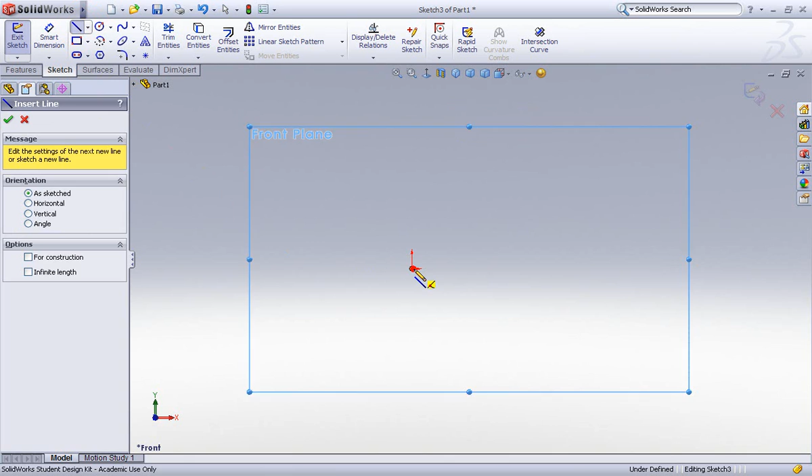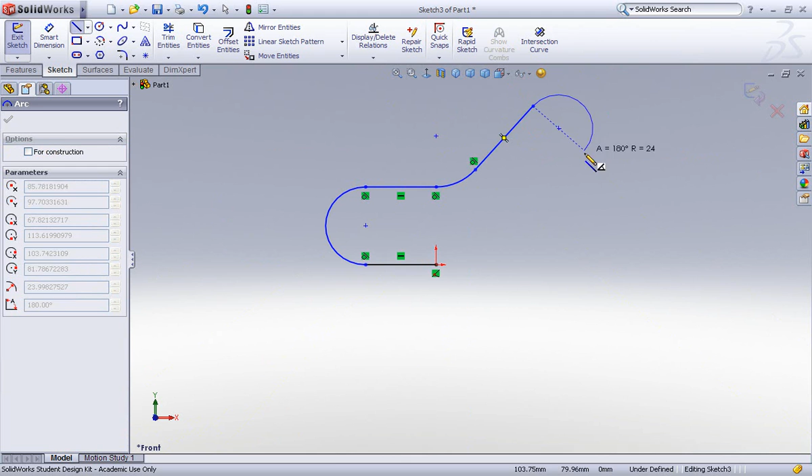Now we're just going to select line here, but we're not just going to do a simple straight line. We're going to put in a few curves and a line or two at angles, just to give you an idea of how flexible a Swept Boss/Base can be. Really, when you're marking out a path for your extrusion, the only thing that's limiting you is that if you make any curves that come back around in the same direction too narrow, SOLIDWORKS can't calculate the geometry properly.

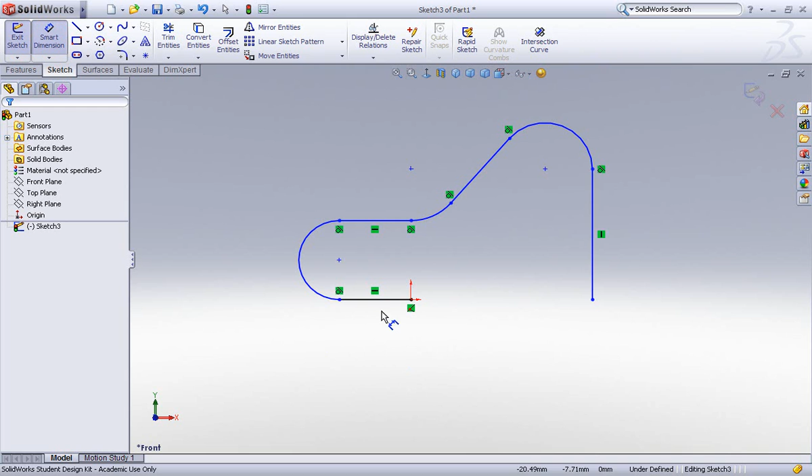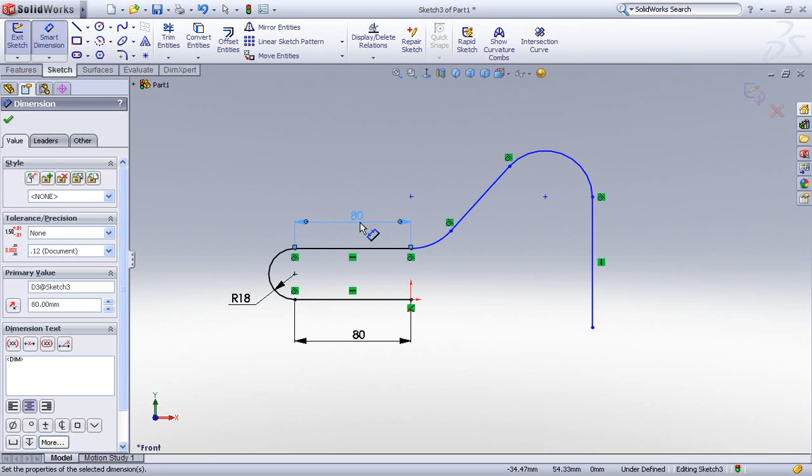So now that we have our sketch done out, next step is to smart dimension it. You can put down any dimension you like, but remember, try not to make it too narrow for the profile. Also, don't forget that when you're doing a sketch, it's always important to make sure that it's fully defined.

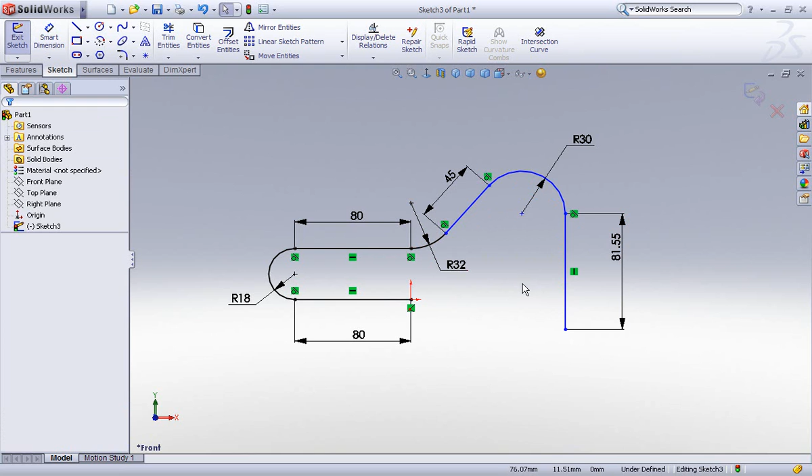So as you can see, there's still some parts of the sketch that aren't fully defined. You can tell by the blue line rather than the black. So I'm just going to exit out of smart dimension and try and move around the lines and see where that is coming from. So the center of the last curve isn't defined from the origin. To fix that, I'm just going to put in the dimension stating where that is from the origin.

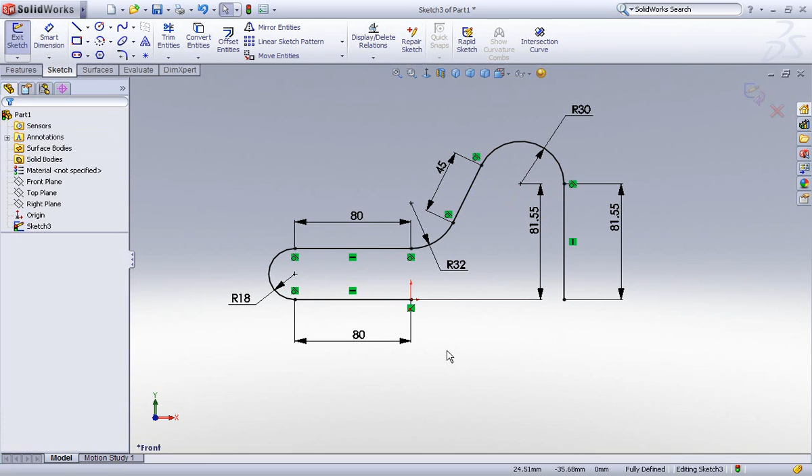And that's our path complete. The next step is to create the profile that's going to run along this path. So when we're looking to place our profile, the first thing to do is where are we going to locate it? The origin is probably the best place right now because it'll make defining it fully much easier. Plus, it happens to be on the end point of the line.

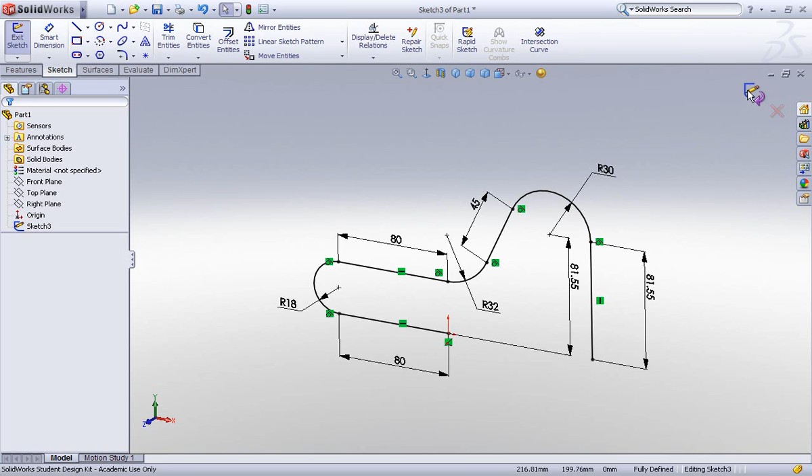Now, keep in mind that we're going to be doing this on the right plane, so it's actually not going to be on the same plane as the path that we've just drawn. So we'll actually have to exit the sketch so that we can do a sketch on another plane. So click right plane, sketch, and normal to. Now for the profile, we're going to try a polygon. In the polygon manager, you'll see we have quite a few options here. One of them in particular is for construction.

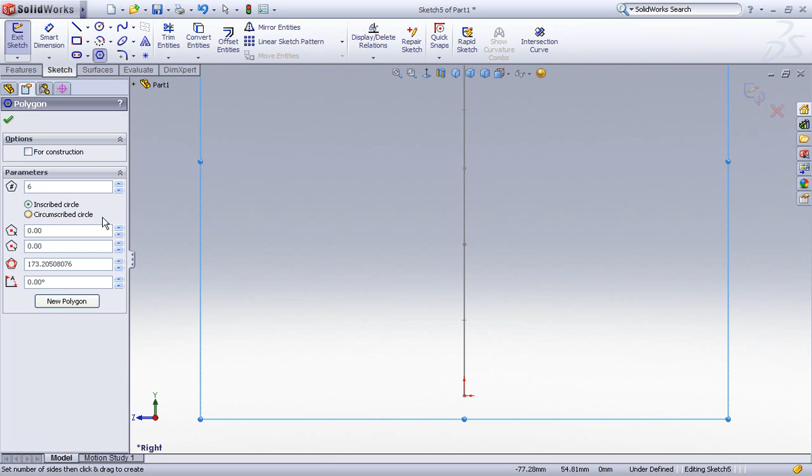This works on the same basis as the for construction option for the line, whereby if I was to click that, I'd have a polygon in construction and it wouldn't show up on the end part. But we're going to keep this unticked for now. This box here basically defines what type of polygon it is. Right now it's set to 6 sides, so it's basically going to be a hexagon we're going to be drawing out. And you can also decide whether it's going to be an inscribed circle or a circumscribed circle. So we're just going to keep these options as they are.

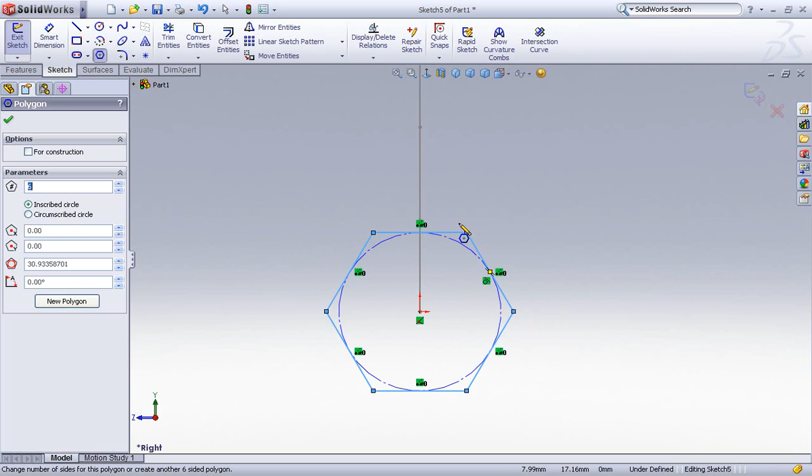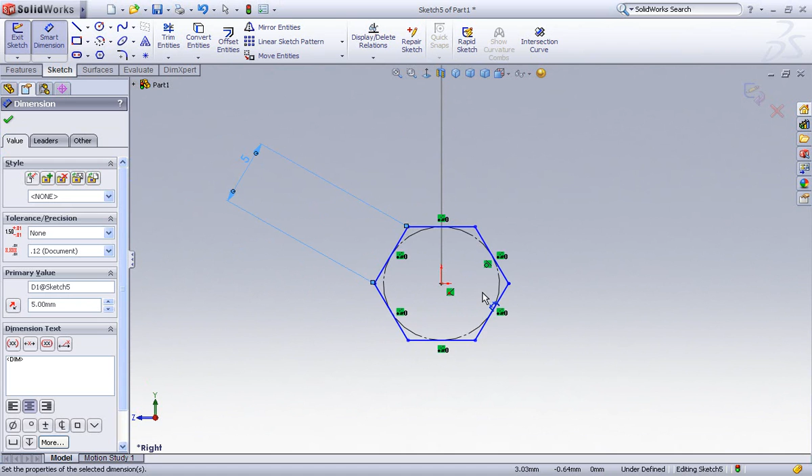So you can see that when sketching out a polygon, it sketches out much the same way as a circle. That's because you're using a circle to determine the shape of the polygon. Right now we have it as an inscribed circle. And then it's as simple as smart dimensioning one of the edges. Now you may find that this isn't enough to fully define the sketch, so you may have to add another measurement elsewhere. Key in that measurement, and the sketch is now fully defined, and we're ready to move on to extrude it.

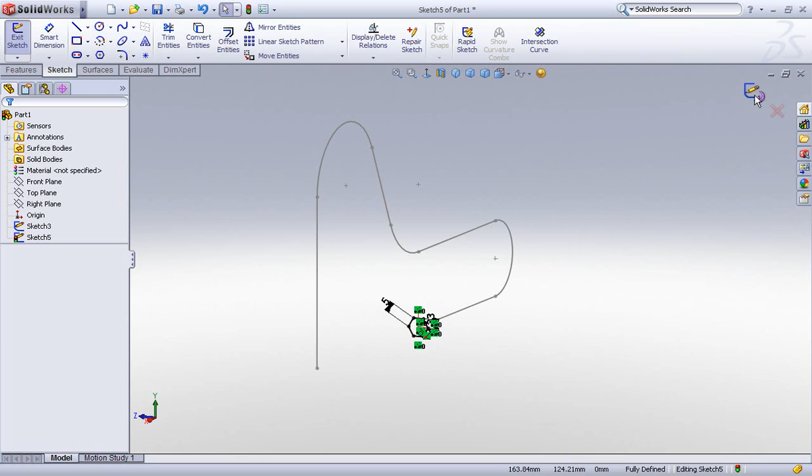So this final step is really the simplest part of creating a swept boss base. To begin with, we'll have to exit out of all sketches, and then move into features. Swept boss base should be in the features toolbar by default, but if it isn't, all you have to do is go up to customize, commands, and it should be in the features bar right here. So just select it and you'll have it.

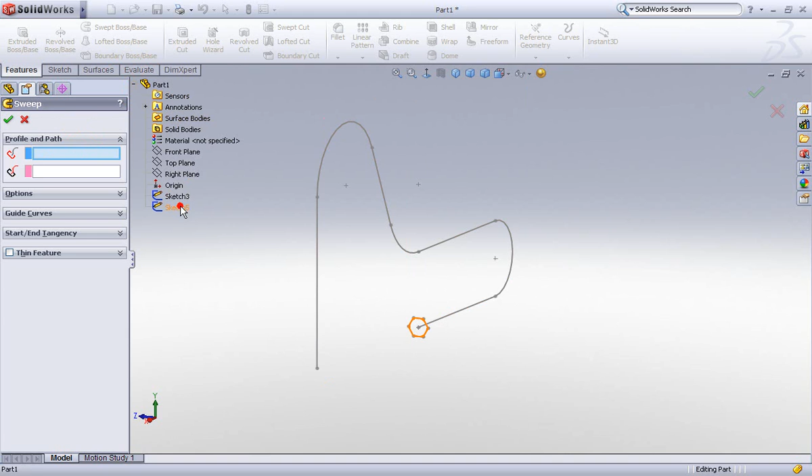Now you'll notice that in the feature manager for the sweep you're given 2 boxes to fill out, the profile and the path, and we have both of these here. It's currently selected on the profile, so from the drop down menu we'll just pick the sketch, and then we'll select the path. And as you can see, it should automatically generate a preview. Select OK if you're satisfied, and there you go. You have your swept boss base.